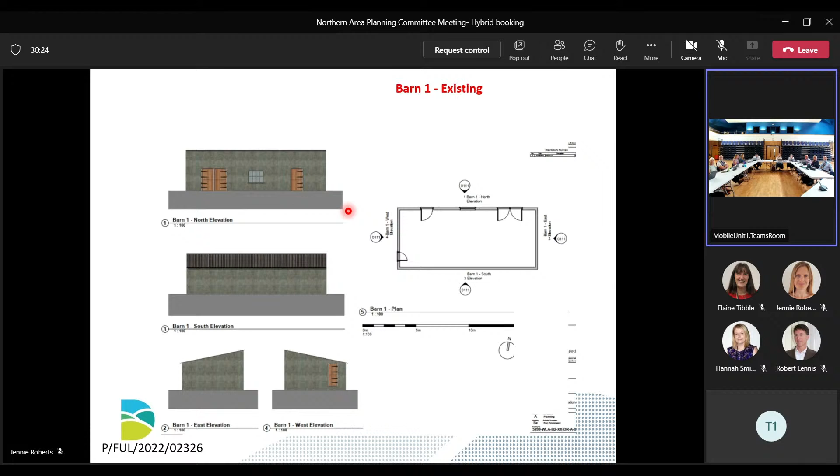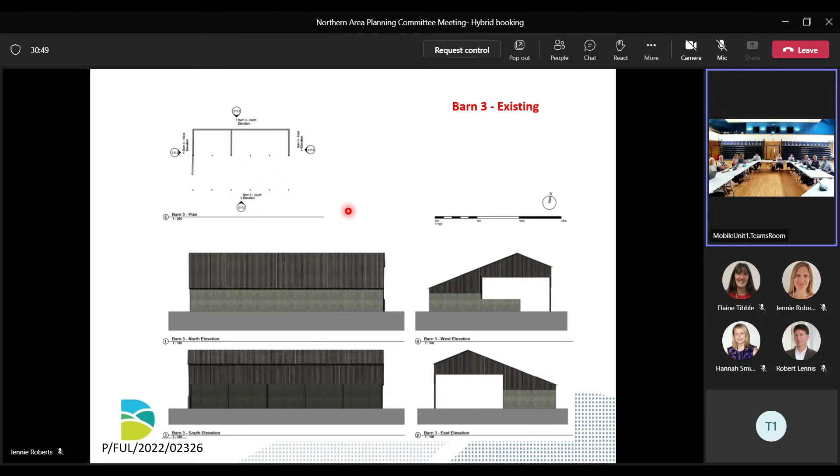This is the existing barn to be demolished, so I'll quickly run through what the existing ones look like - the second existing barn, and the third. They're fairly modern agricultural buildings, not of any heritage value, but equally not considered to cause any harm to the site. They have a neutral effect on the conservation area and the area of outstanding natural beauty, particularly given their height and size. They're what one might expect to see in such an area.

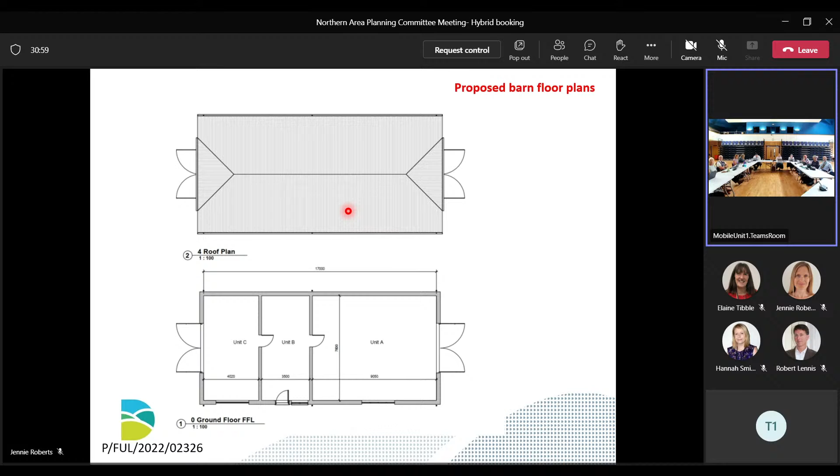There's a proposed barn as part of this application, to be in the northern part of the site - these are the roof plan and floor plans, and this is the elevation slide to show what it would look like.

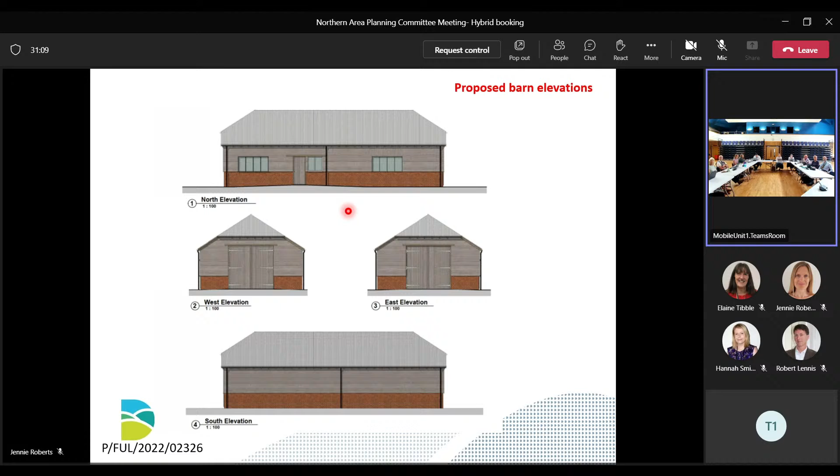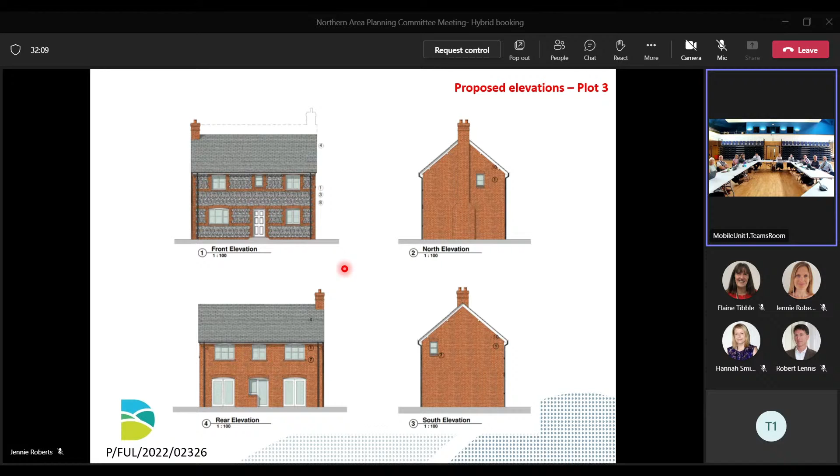Second dwelling is a detached 3-bedroomed. Then we have a smaller third detached dwelling, which looks like this. The pair of semi-detached properties - this is floor plans for those, and this is the elevational drawing.

So, when it catches up...

Sorry, that side. Yeah. That better? That better? Try and show a little bit. Okay, project.

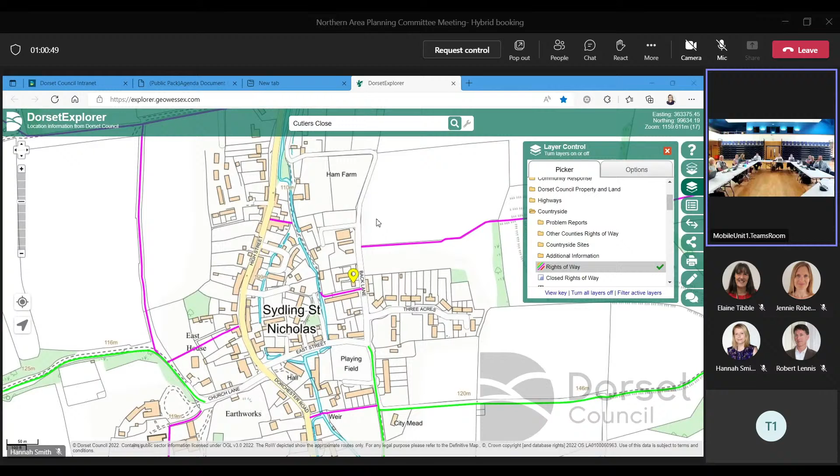The application site can be seen. Yeah, that's the application site, and the purple lines are the rights of way, the public footpaths around the site. So you could look back towards the site from the open countryside from the footpaths and see this edge of settlement site here.

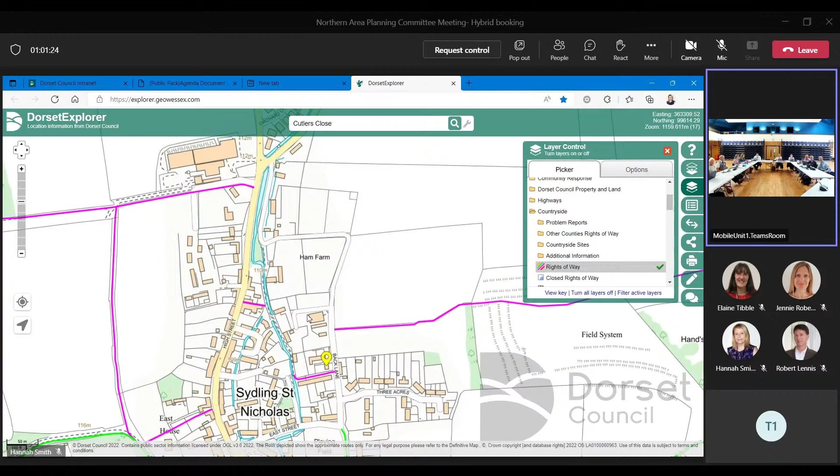If I zoom out a little bit, you can see the land increases in terms of the gradient here. So you're walking uphill from here, and you look back towards the village from the footpath.

I think that's part of the AONB concern, that at the moment, even though it does have buildings on it, it's very rural in its appearance. They appear as agricultural buildings. And I think the form, massing and scale of the buildings proposed are quite a significant increase in built form on that edge of site, taking away the fact that it's in the countryside, not near a settlement boundary.

It's looking at the actual site constraints. It is visible, it is that transition, as Jennie said, to the rural countryside area. The whole of the area around the site is in the conservation area, so you've got that sensitivity there, and the listed buildings.

There have been some amendments through this revised application to address previous concerns, but the end dwelling, the detached dwelling, is still a very large, bulky, detached house, so it's not subservient to what's around it, which is predominantly two-storey, smaller scale bungalows and traditional dwellings with lower eaves, more what you'd expect in that area. Whilst there might be design elements in the scheme that reflect the village, overall it's not an intrinsic character that reflects the historic form of the settlement.

You can see here, this is a D road, so they're not classified but still maintained roads. You can see the extent there on the blue. If we could go back to the presentation, the photographs - I think that's what Councillor Cook is referring to. I feel that little pin marker there is Cutler's Close rather than the actual property itself. It's an address point, the site is above there, so you're right.

So it looks like the maintained section ends here. It does, and then it's unclassified - the rest of it was unclassified.

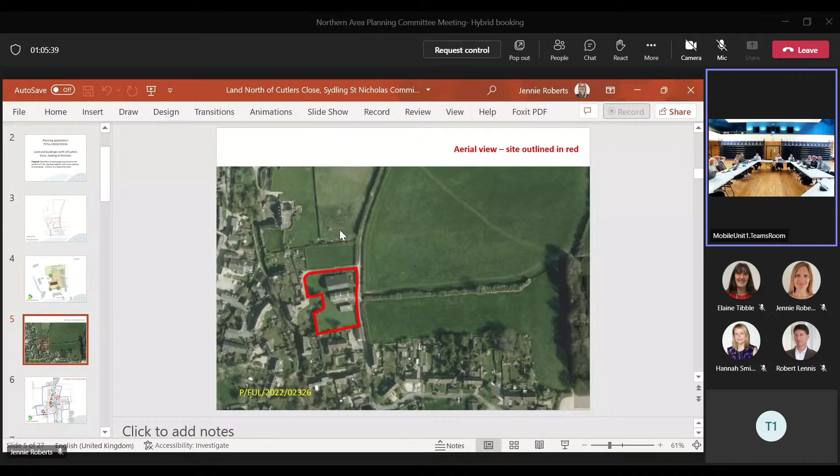I thought I heard mention that it was a private road. Oh, that's the one to the north of the site. Oh, all right, Little Close, private, sorry, don't let me confuse the issue. Let me just keep the photographs so we can see.

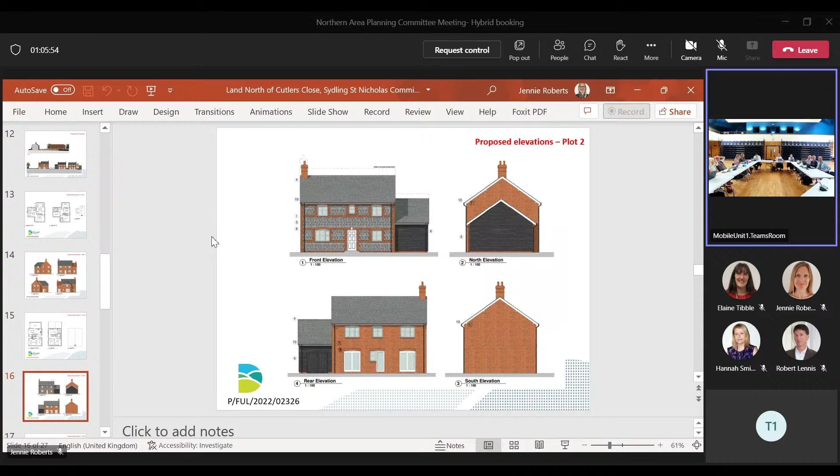Yes it does. Also, what about access for refuse collections and emergency vehicles - have we tested that there would be access for emergency vehicles and refuse, or have we not tested that? Those are covered by building regulations and safety measures, but there's no reason why you couldn't get access, or there would be requirements through building regulations to mitigate, like sprinkler systems or such like. But it's not something you need to concern yourself about now.

So those matters would have to be conditioned? Exactly, yeah. Good, that's a helpful question, thank you.

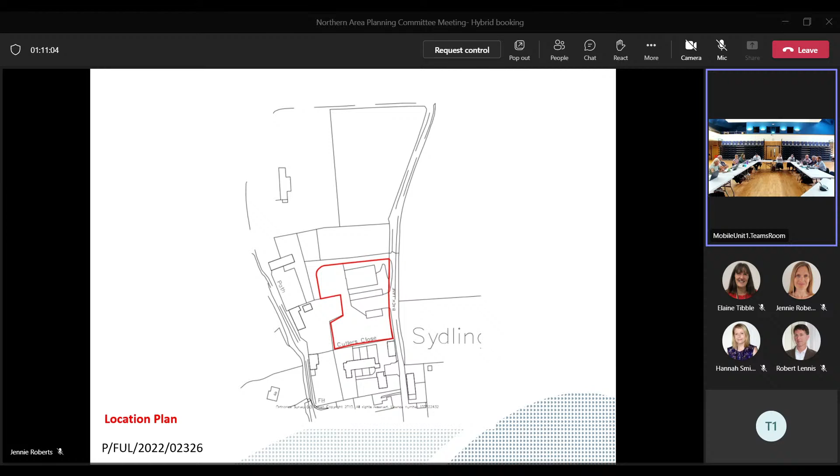I've been there quite often, and I don't think this planning application would help the village at all. It wouldn't enhance the village, it would spoil the conservation area, and it is outside the existing development boundary. And quite frankly, the houses are the wrong type of housing anyway. They wouldn't be bought by local people, they're far too large, they're not affordable housing. And I think we have many reasons to refuse this.

I'd like to recommend refusal on all the grounds, particularly the fact that we already have enough housing land here. Many years ago, Sydling actually gave forward some land for affordable housing for local people, but this isn't that type of housing at all. It's housing in the wrong place, and it would spoil the village.

That's very helpful. So that's a proposal to refuse. Before I call for a seconder, I'll let the debate run a bit more. I see Councillor Pothecary's got her hand up, and Councillor Rideout. Thank you, Chairman.

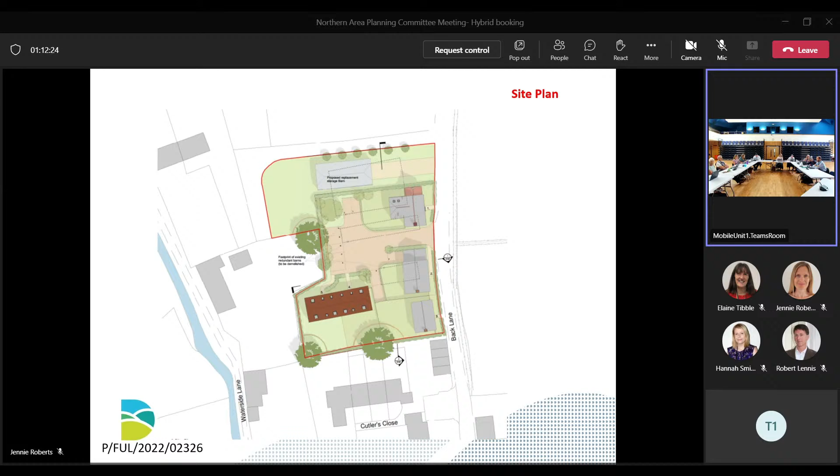A most beautiful village, and well deserving the protection afforded to it as a conservation village sitting within the AONB. To be honest, listening to the comments and the report, I'm not too concerned about the extra vehicle use or the possible unsustainability of the site. However, I am concerned about flooding issues, and I'm not keen on the height of the building shown, which makes the redevelopment more obvious in the conservation area and AONB. My colleague here, I don't think they're villagey looking, they look incongruous. So I consider the building form and large-scale design of the buildings to still be undesirable.

Thank you very much, Councillor Rideout. Thank you, Chairman.

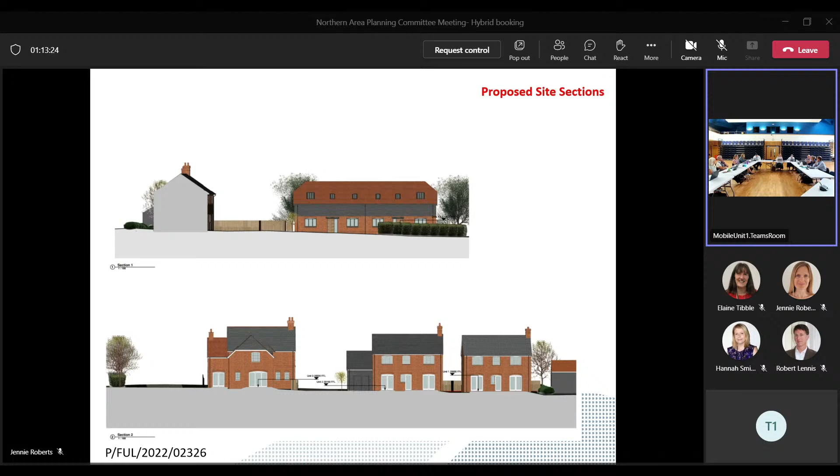The NPPF guidance states that planning authorities must take due regard to conservation areas, listed buildings, and AONBs. I think that is very important in this case. I don't see any material change from the last refusal, and should this proposal go forward, it's going to enclose those listed buildings and change that edge of village character forever. So I don't think I should be supporting it.

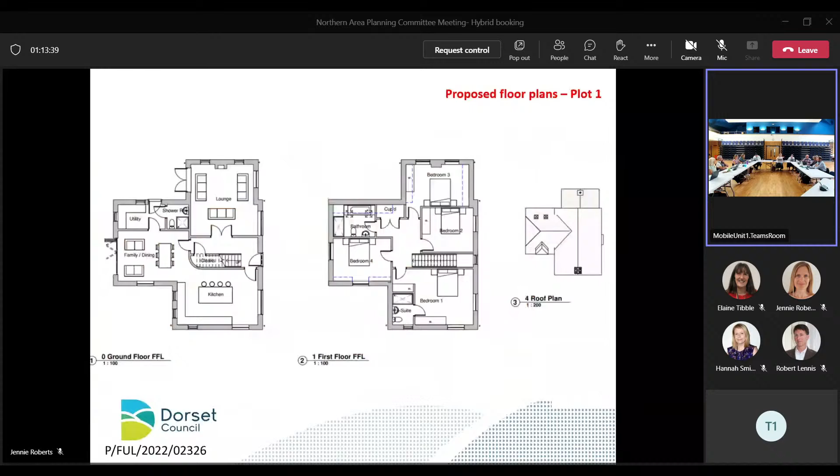I too agree with my colleague here, but the development is contrary to S2 of the local development plan. It's outside the local development boundary. It's going to have harm on the AONB. It's overdevelopment of the plot. It's not a sustainable location, and it's not an exceptional case as per the NPPF. And I'm really concerned about foul waterways these days. I don't see any mitigation into phosphates going into the local water stream, and I think that needs to be something we bring up in every planning now, because we have a problem in parts of the county where we can't build. So I would totally agree, and I support Councillor Jones in what she said.

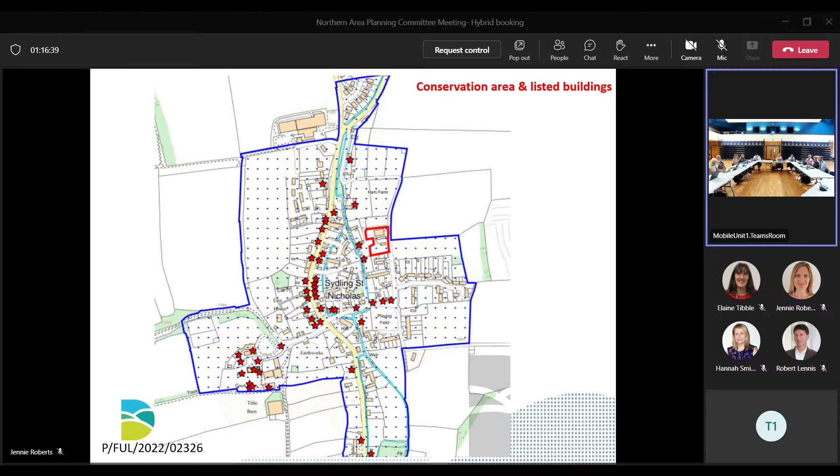Not necessarily for this development, but I just wanted to come back - I think that market forces determine somebody wants to buy a property in a rural location with few amenities, and I don't think that's a planning consideration. I think the site as it is, is scruffy, and I think something should happen on that site. I'm not saying this is the right development, and perhaps something a little less conspicuous would work, because at the moment it's just scruffy and something could be done there. I wonder whether our approach would be completely different if we did not have our 5-year housing supply, and I'm not sure whether we have our delivery test on it, but I'll go with the flow. I'm happy to go with the flow, but I have some sympathy for the landowner, because something nice could happen on that site.

That's very helpful, thank you very much. Is anybody else want to say something? I think we're about ready. We've had a proposer and a seconder that we refuse this on the grounds outlined in the officer's report. I'm not hearing any dissent from that, so I think we're ready to go to the vote. All those in favour of refusal on the grounds outlined in the officer's report, please raise your hands. Any against? Any abstentions? Okay, that application is then refused.